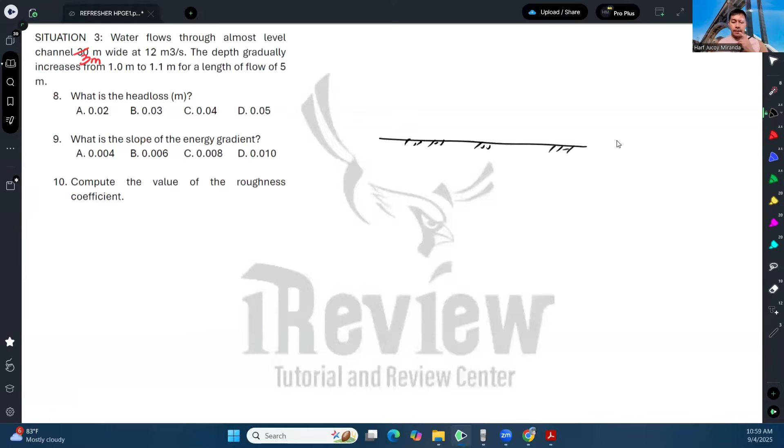Let's say this is the bed of the channel. From 1 meter depth, the water gradually rose. Let's exaggerate it like this. So the water gradually rose, and this is the direction of the flow.

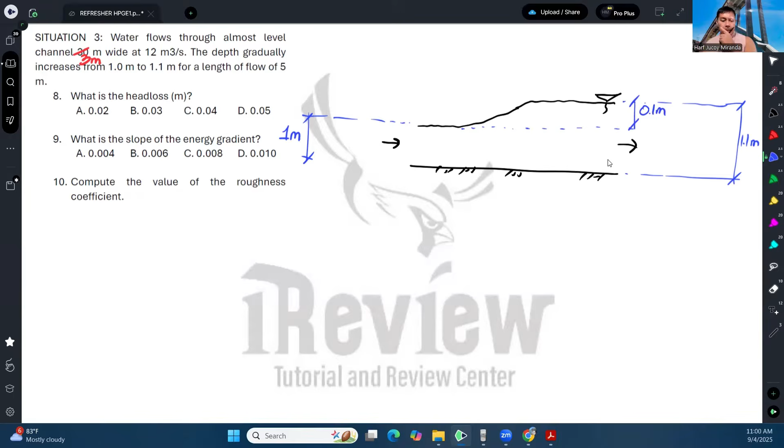So what happened here is just 1 meter, then here it became 1.1. So there was an increase of 0.1, and that increase happened over a distance of 5 meters.

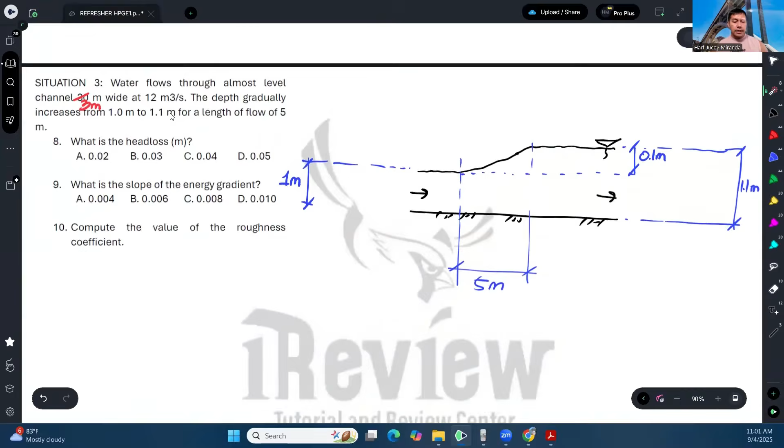That's why it's asking what is the head loss, etc. So to answer this, first we have to analyze that the channel is 3 meters wide, meaning this is just a rectangular channel.

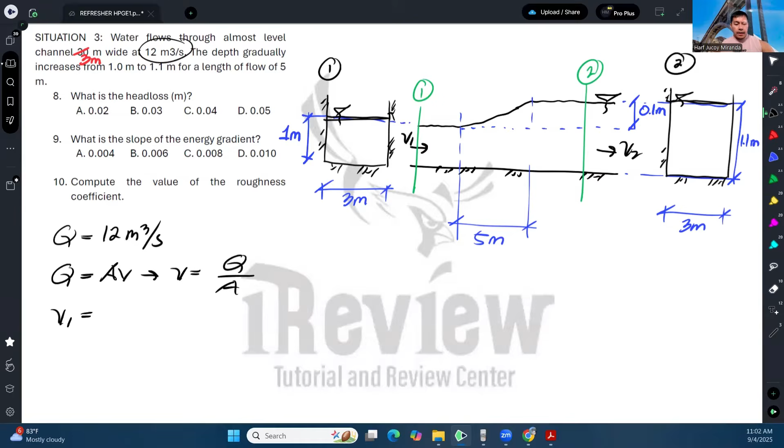Since we have the dimensions and the flow rate, the first thing we can do is solve for the velocity, V1 and V2. Since flow rate equals A times V, velocity equals flow rate over area. So V1 is just 12 cubic meters per second divided by area, which is 3 times 1. That gives us 4 meters per second.

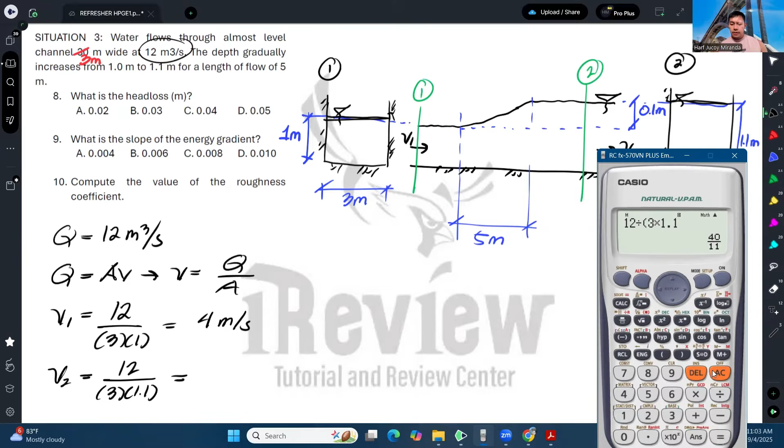While V2, that is 12, same flow rate, divided by 3 times 1.1, that gives us 3.636.

So now we have V1 and V2. Now to calculate the head loss, we can once again use Bernoulli's energy equation. I will use this as point 1, and this as point 2 after the increase. For our datum, we can make use of the bed.

But this could also work. Anyway, Bernoulli's energy equation: energy at point 1 minus head loss equals energy at point 2. Energy at point 1 is P1 over gamma plus V1 squared over 2G plus Z1, minus head loss, equals P2 over gamma plus V2 squared over 2G plus Z2. But since this is an open channel, there's no pressure term because it's exposed to the atmosphere.

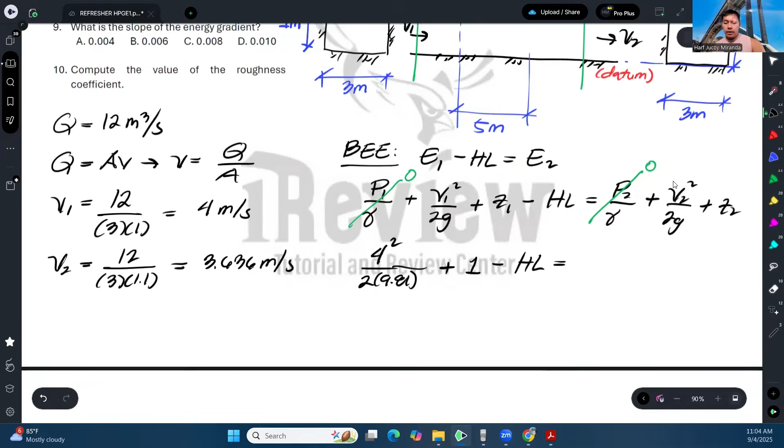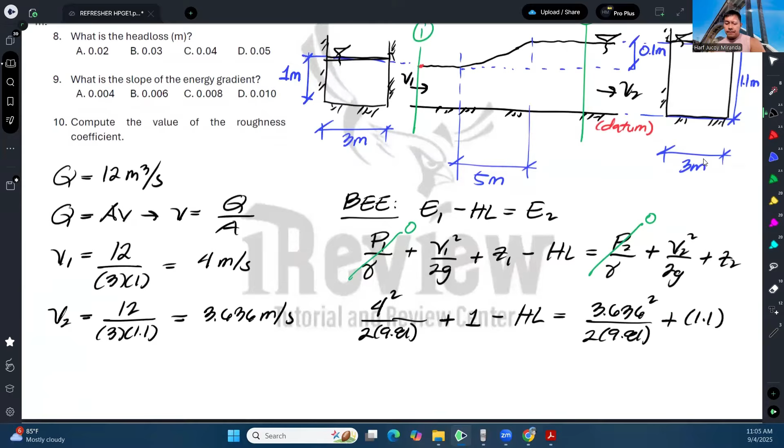So now, V1 is 4 meters per second, so 4 squared over 2G plus Z1, which is this point 1 here with a head of 1 meter. So 1 minus head loss equals V2, which is 3.636 squared over 2G plus Z2, which is 1.1. From there, we can solve for the head loss.

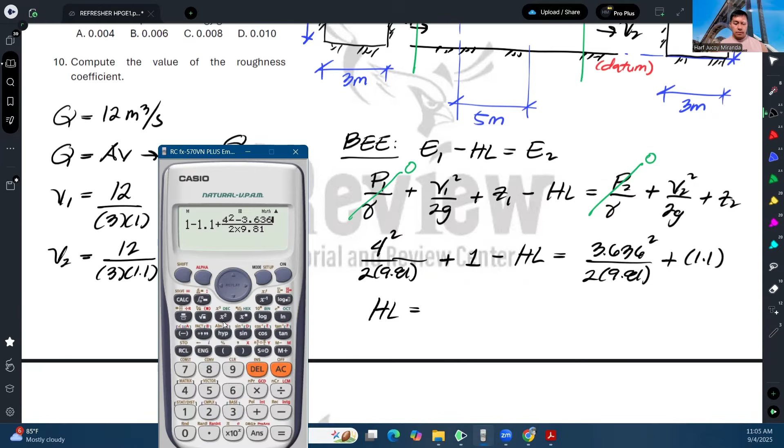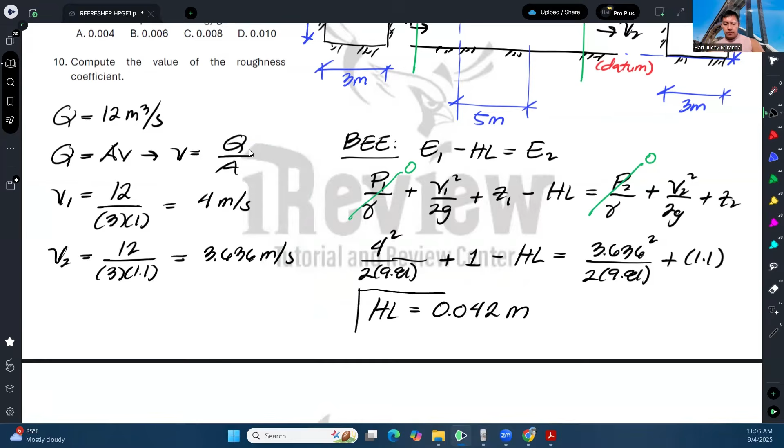That gives us 0.042, so that will be our head loss.

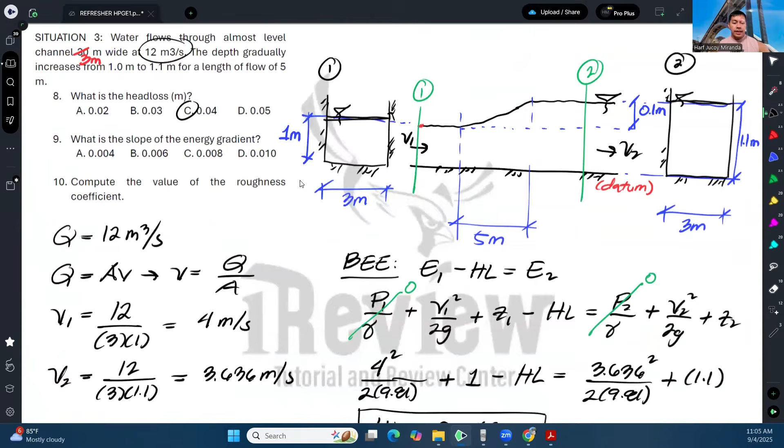So letter C. For number 9, what is the slope of the energy gradient?

If we draw the energy gradient, at point 1 this is the elevation head, then this is the velocity head. At point 2, this is the elevation head, then this is the velocity head. Then this is the head loss.

This minus this equals this. So now what is the energy grade line? This is the energy grade line.

So what's its slope? As you can see, the slope is just this: the run is 5 meters, and the rise is the head loss.

So the slope is just head loss over 5, or 0.042 over 5, and that is 0.008.

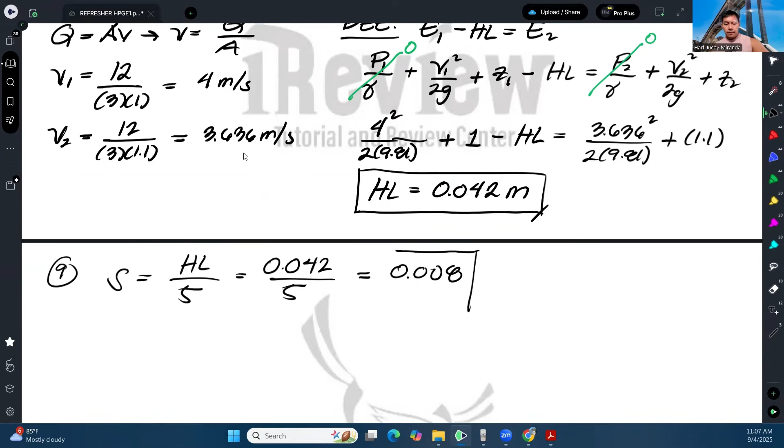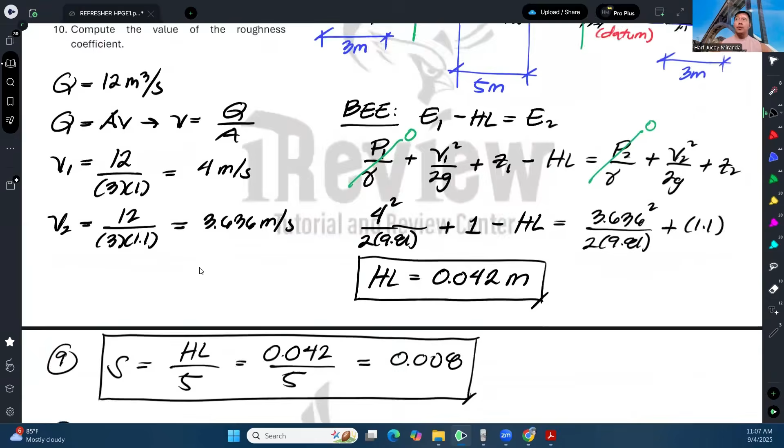Lastly, number 10: what is the roughness coefficient? Here we'll pull out Manning's equation: velocity equals 1 over n times hydraulic radius raised to 2/3, times slope raised to 1/2.

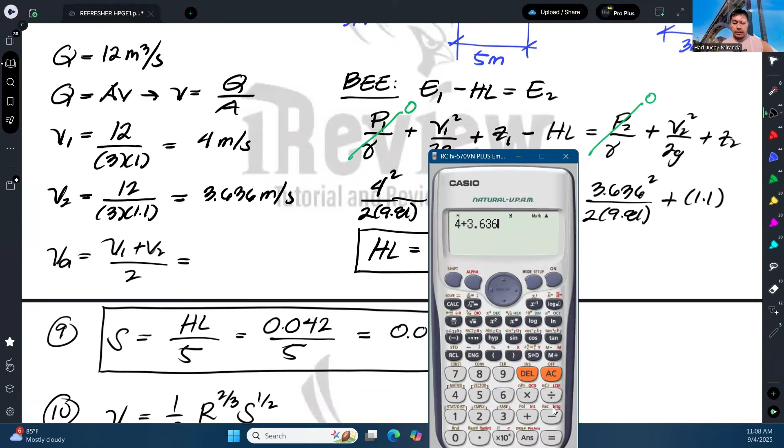We'll also get the average velocity. So the average velocity is V1 plus V2 over 2, that's 4 plus 3.636 over 2, so 3.818.

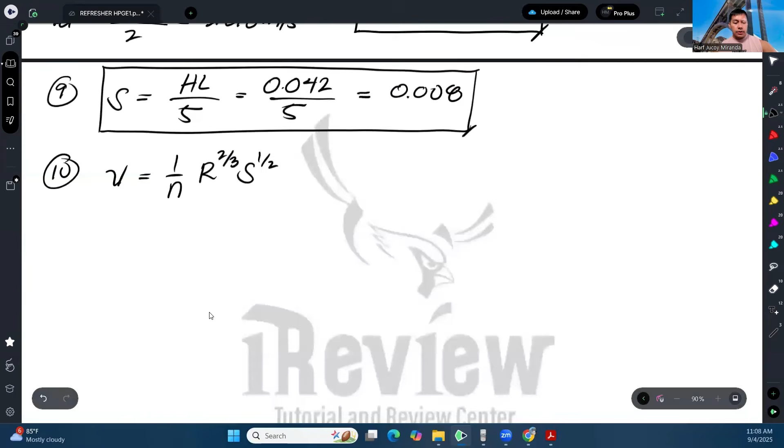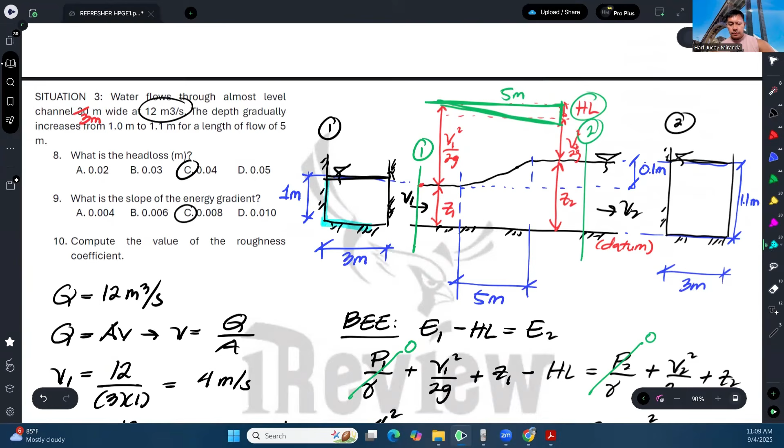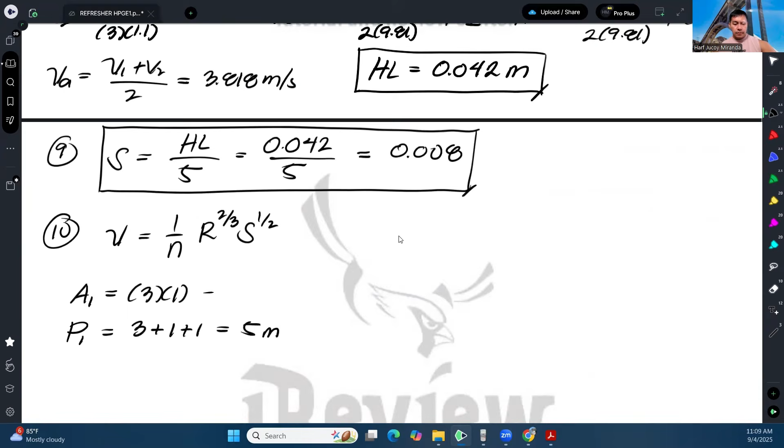Then we also need the average hydraulic radius. So taking area 1, that is 3 times 1, then the wetted perimeter 1 - when we say wetted perimeter, it's just this, which is 3 plus two 1's, so 5. Therefore, the hydraulic radius for the first one is area over perimeter, giving us 3 over 5, or 0.6.

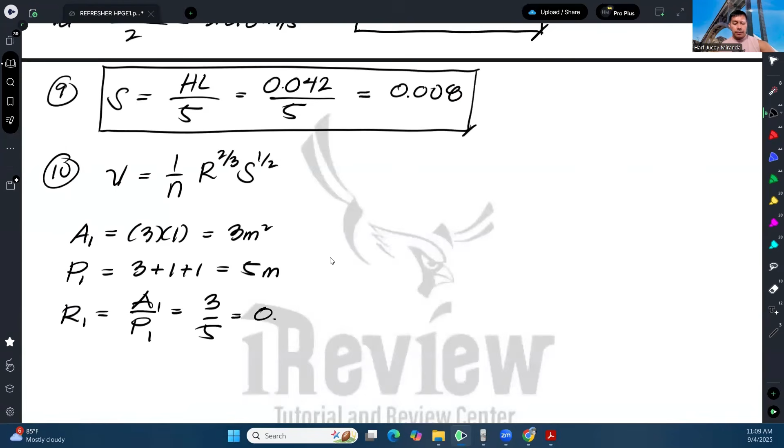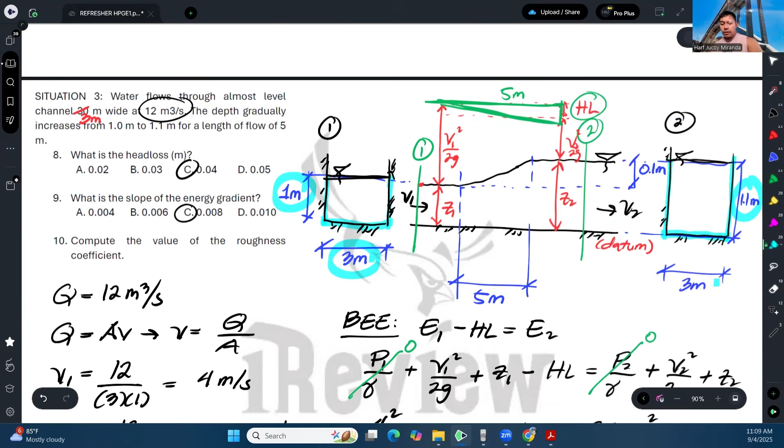For area 2, the difference is just the depth, 1.1, so that's 3.3 square meters. Then the wetted perimeter 2 is this plus this plus this, so two 1.1's plus 3, that's 5.2 meters.

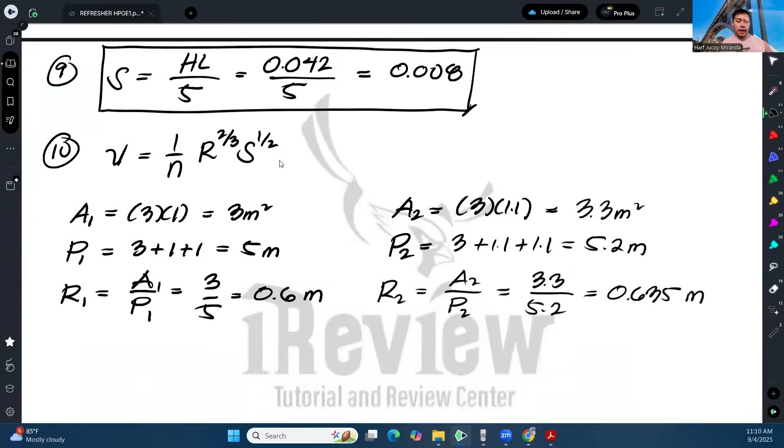Therefore, our hydraulic radius is area 2 over perimeter 2, that's 3.3 over 5.2, which is 0.635 meters. So our mean hydraulic radius would be 0.6175, or 0.618.

Okay, so that's our average. Now we're ready to use this.

So our average velocity is 3.818 equals 1 over n times 0.618 raised to 2/3, times 0.008 raised to 1/2. From there, we solve for the roughness coefficient: 0.017.

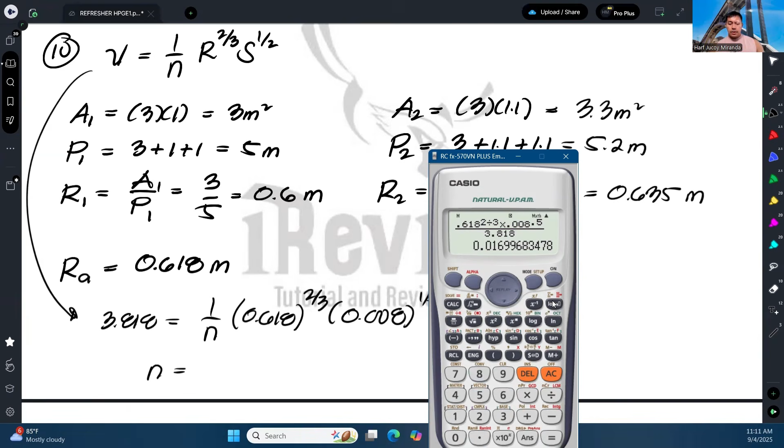So that will be our answer. I forgot to include the choices, so that is letter C.